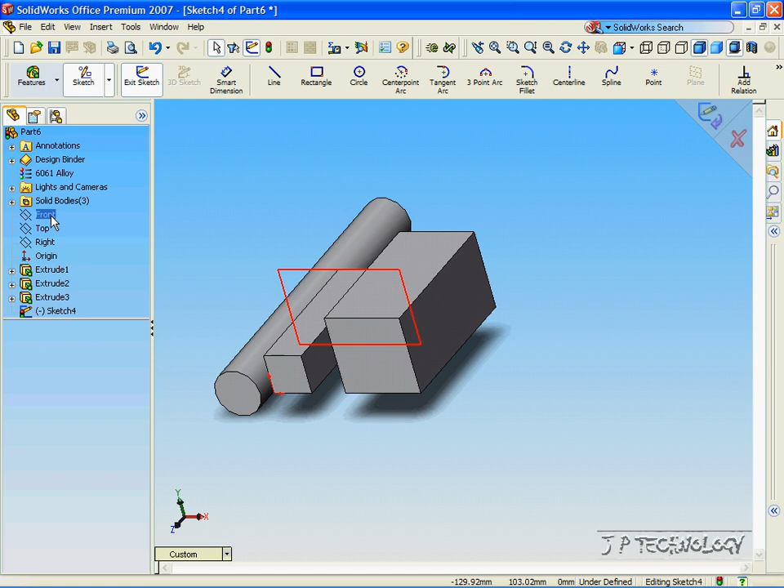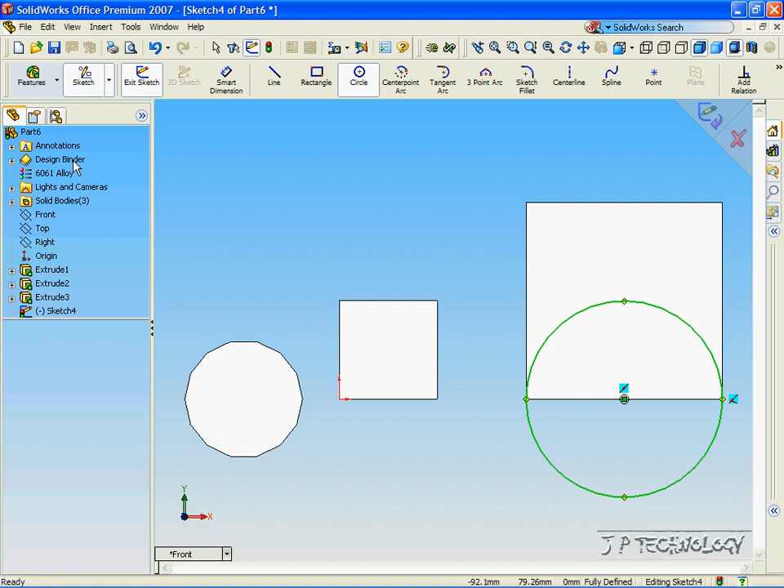Now, to start off, let's click the front plane, click front view, and let's sketch a circle on the biggest square. And that red dot is the midpoint of that line, so let's make a circle right there and continue it out to the point. Click enter, click OK. Now click feature, click extrude cut.

Now click isometric view, so now you can see where the extrude cut is going. Now in the extrude cut, just like the extrude base, I'm not going to cover all of them. In this one, I'm going to cover the blind extrude cut, through all, up to surface, and midplane. Up to next, up to vertex, and up to body are exactly the same as the up to surface, so you can see how I do the up to surface and do the other ones just as well.

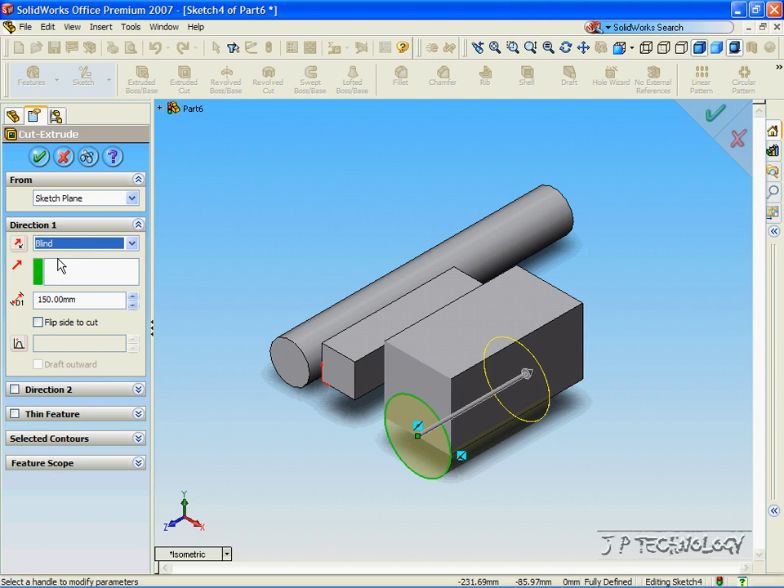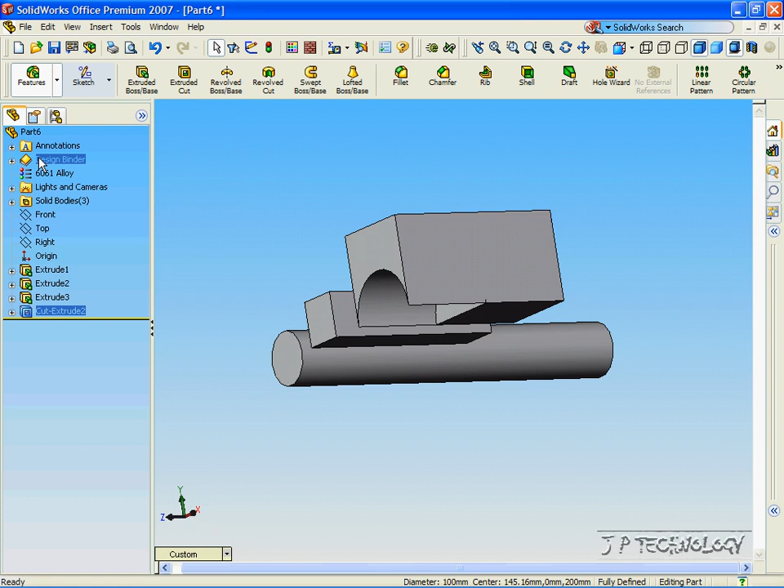So the first one, let's click blind, and just like the extrude blind, the extrude cut blind, as you increase it, the cut gets bigger, and as you decrease it, it gets smaller. For this cut, let's make it 100 millimeters, click enter. You see the preview, and we like it, so click OK. And now we've cut 100 millimeters into it.

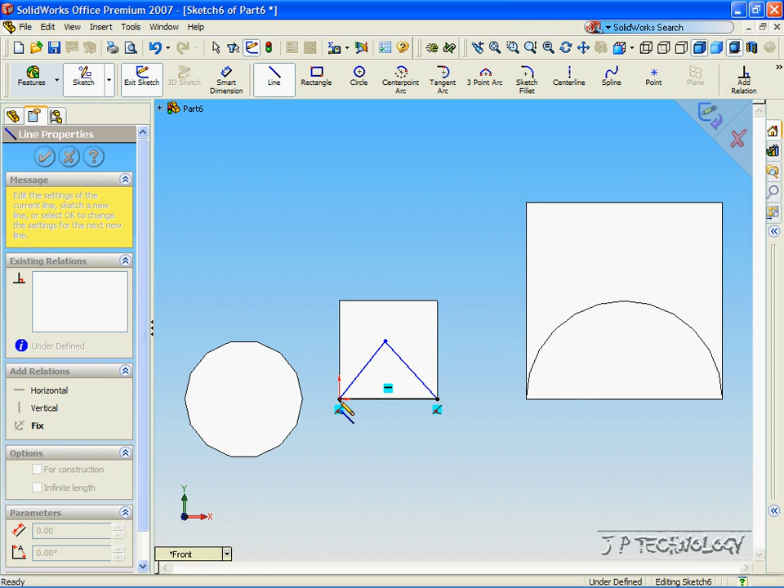Now, click front view, click the front plane, click sketch, click line, and this time let's make a triangle inside the smaller square. Okay, now accept the drawing. Now right click the sketch, click edit sketch, click features, extrude cut. For this one, we're going to do the through all. Click through all.

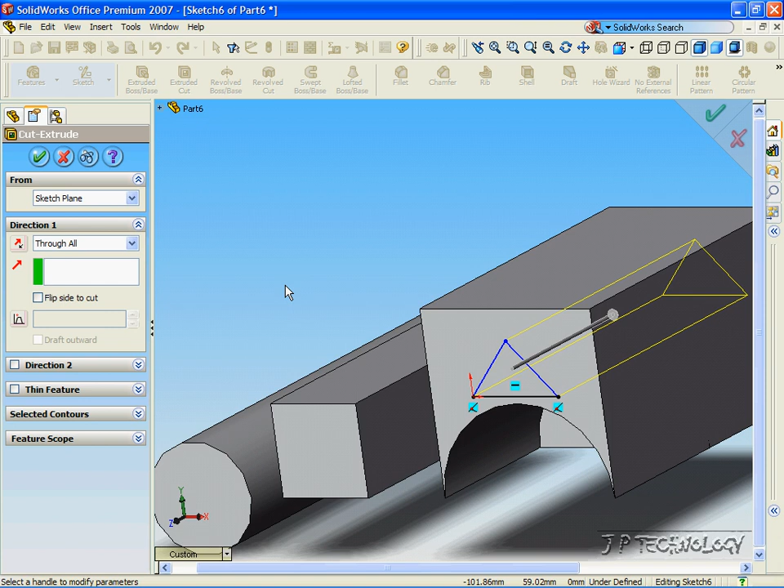And for this, you can see the preview that it's going behind our drawing. It's not where we want it to go. So to flip it, you click the reverse direction, and it flips direction. With the through all feature, whatever the surface is or the body, it's going to go all the way through it. So with the blind, we can pick how far we want to go into the body.

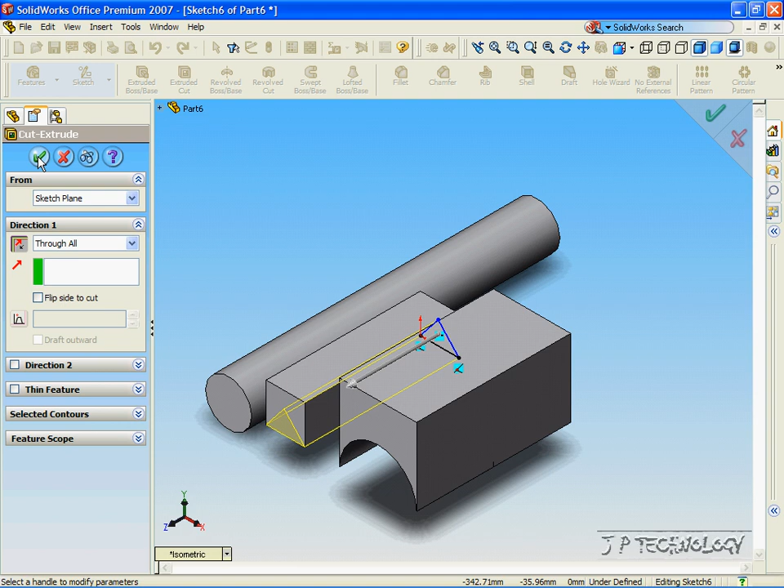With the through all, it's a cut through everything. So we don't have to define any length or dimension. It's going to go all the way through that square. We see the preview, and it's the right direction and orientation. Now click OK, and we've cut the triangle all the way through.

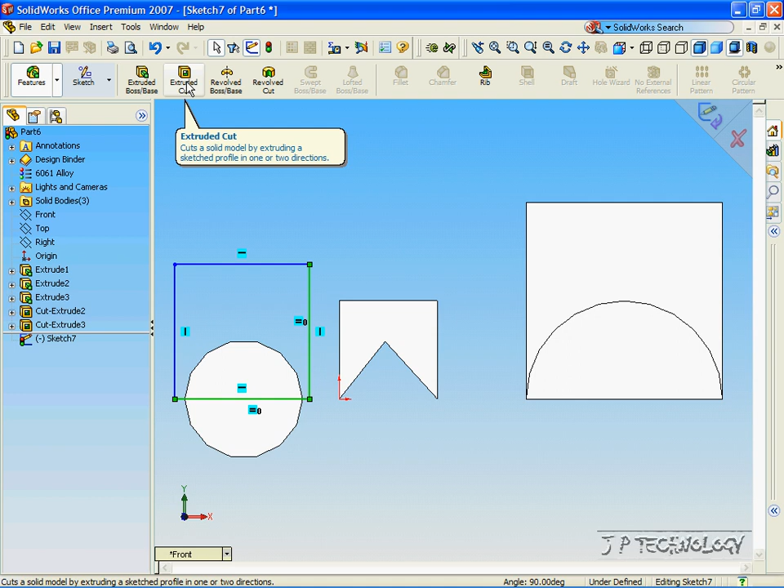Now click front view, click front plane, click sketch, click rectangle, and for this, we're gonna make the circle half a circle. So click up there, click the add relations button, click one line, click the other, and let's make them equal. Click OK. Now click feature, click extrude cut, and for this one, we're going to do it up to surface.

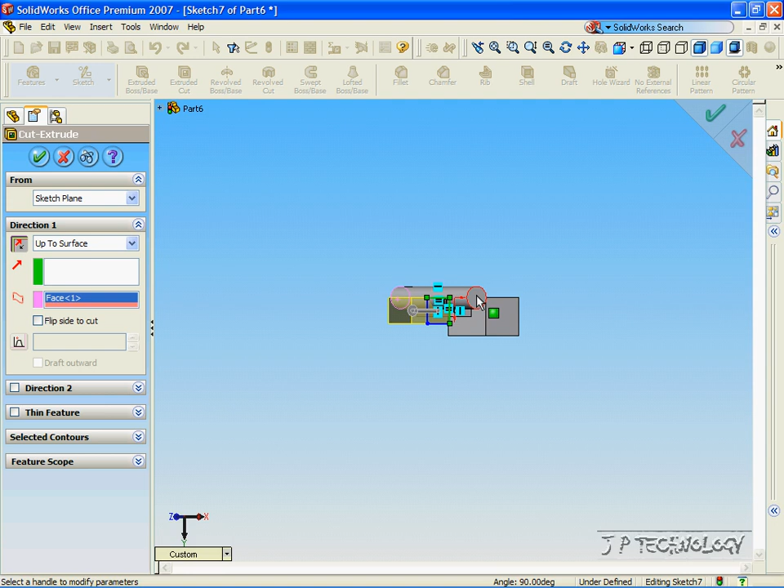Click the up to surface, and for this, we can click it up to this surface, or we can click it up to that surface. Depends which way we want it to go. So let's do it backwards. Let's do it that way. We like it like that. Click OK, and we've extrude cut.

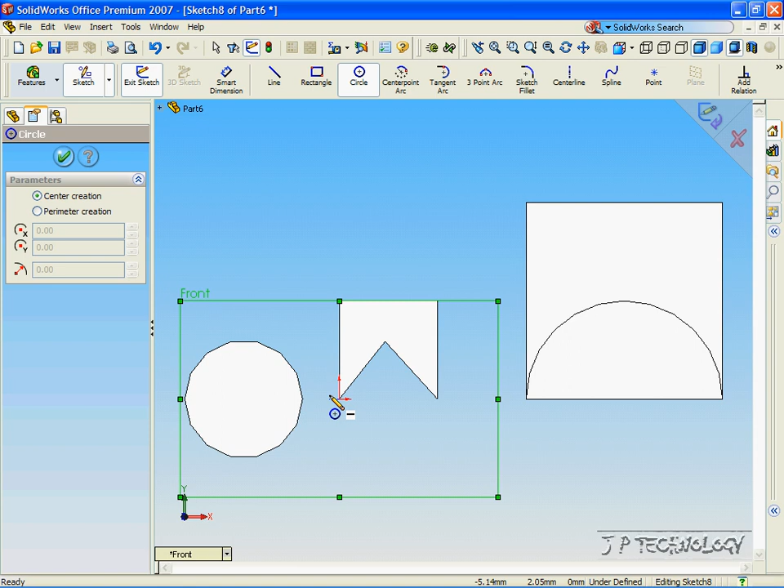Now click front, click the front plane, click sketch, click circle, and this time let's go into the center of the circle. With a circle, to find the center, put your pointer on the outside, leave it there, and then you'll see the 4 points for the 4 outside points, and then the inside point is the dead center of the circle. So let's draw a smaller circle on the dead center of the circle, and let's make the radius 10 millimeters.

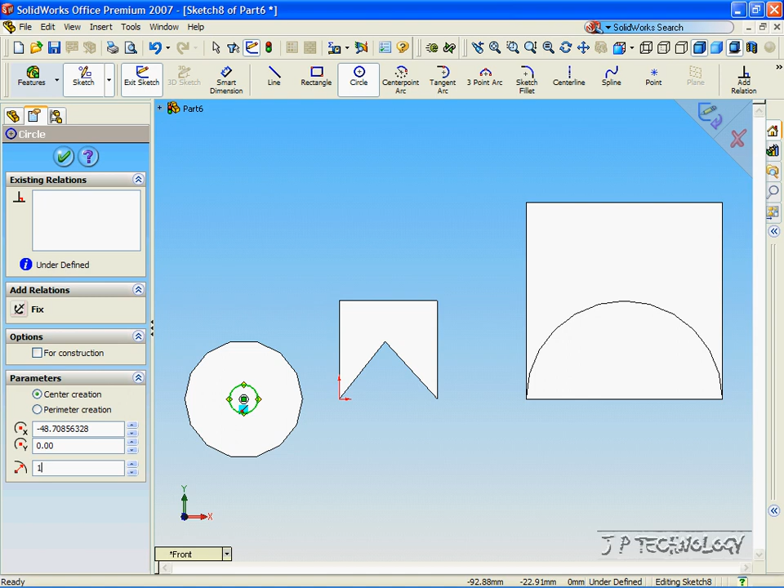Click enter, click OK. Now let's cut this circle out, click feature, click extrude cut, and this time let's do a mid-plane cut. Now click inside SOLIDWORKS and let's zoom out so we can see what our cut looks like. And as you can see, like the extruded base, there's the green circle and the two yellow circles. As you increase it, it increases, and as you decrease it, it decreases.

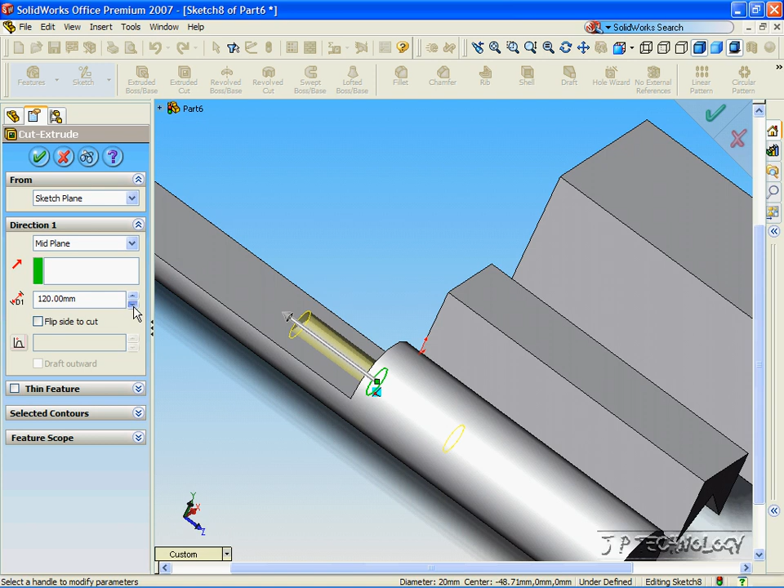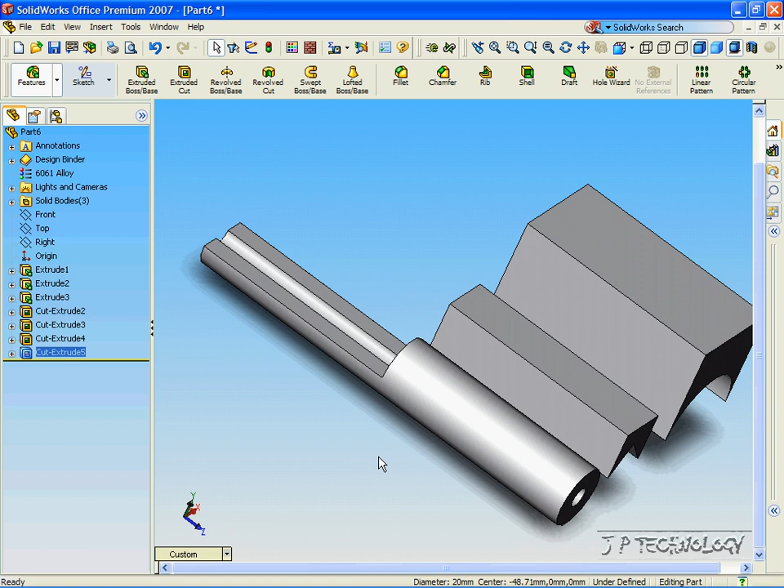Now for this, let's zoom out a bit and let's make it go all the way to the end. So let's type in 400. And now from the preview, we can see that it's going to go all the way through the circle. We like it. Let's press OK. And now we've cut through the midplane, through the whole circle. Click front, and you can see it went all the way through. Click isometric, and that concludes our tutorial on extruding cut.